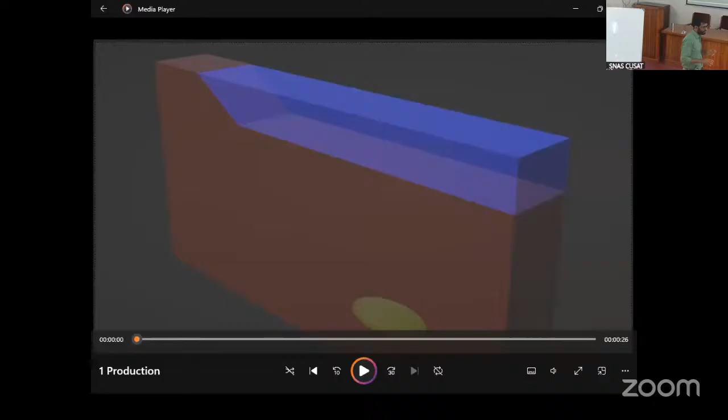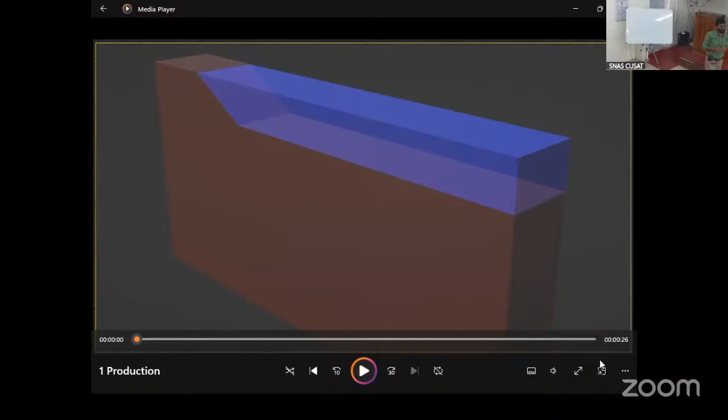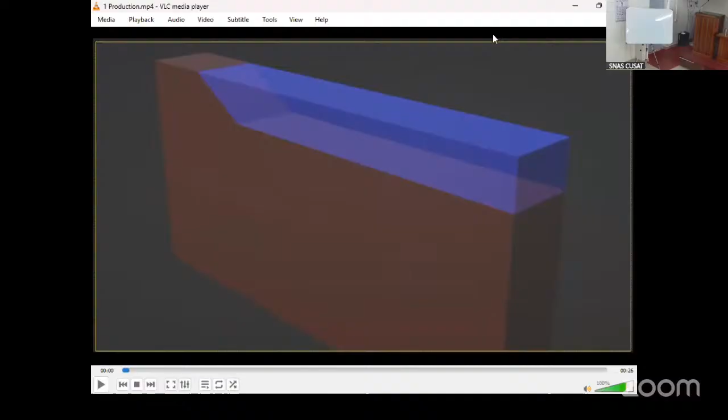Okay, and starting. It is, I think. Okay. See what you see from. No, don't play it, please. Just keep it on the very beginning. I don't want the... it shouldn't be on media player, first of all. There was a different one you were mentioning, right? It shouldn't be open on media player. It was a different one. No, you're opening that in a different player, right? Because I want to... right click open. I think here you can pause anytime, right? When you pause also, you get the complete picture, right?

Okay, see here, what you're seeing on the picture.

Now I am just trying to give you in 5 minutes a picture of how oil is being extracted and sent to the refineries. What is the whole intention of the oil and gas industry? They are extracting oil. Their main aim is to produce millions of barrels of oil or gas, then distribute that to the required areas. Oil means money. That is the only intention of it.

So now what you see here is a sort of simple animation. What you see in blue color, that is the sea, ocean, and what you see below, that is the seabed, the soil. Now, the entire process starts with... can I continue?

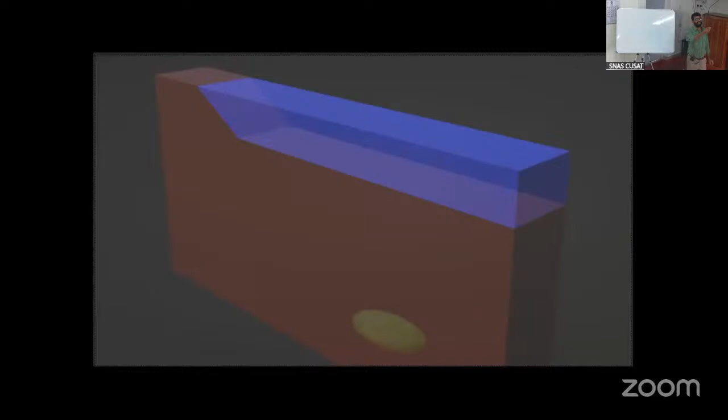Can you just play that, please? So we are finding a potential reservoir there. In that case, we are installing a jacket structure in that area. Jacket structure means we need to have the piling also. Then only it will be strong enough to receive the topsides.

Okay, can you start from the beginning and just pause? Okay, just play. Then whenever I say pause, you pause it. Play it, please.

You're finding the potential reservoirs. Okay, pause. Then the first thing is we are near to that vicinity, we are installing a jacket. A jacket means, this is the jacket structure, we are simply placing it there. Then the real foundation is the piles. The pile is what's holding the jacket onto the seabed. That is giving the restraints.

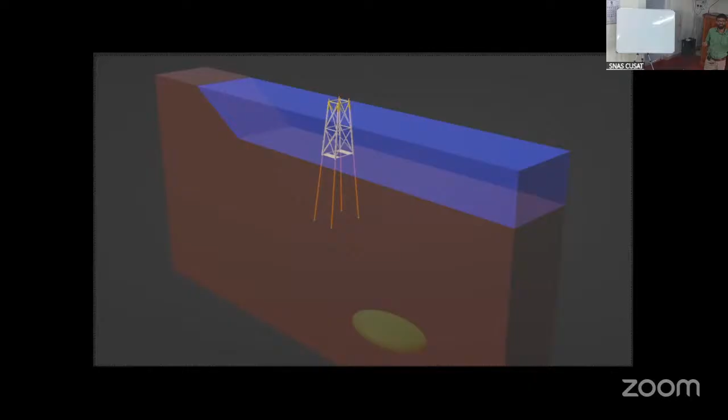Please continue. Then after the jacket, we are installing the piles. Pause it. Okay, once the jacket is installed, the piles are driven. In that condition, we have a very strong foundation. Now it is ready to receive the topside.

Okay, so now, what does the topside typically contain for a wellhead platform?

What is the ultimate aim? We need to extract crude from the reservoir. A main challenge with offshore structures is we cannot have a huge space like a football ground in the ocean. Even any square meter will cost money. So we need to have the very bare minimum facility in the ocean, doing only the bare minimum process offshore.

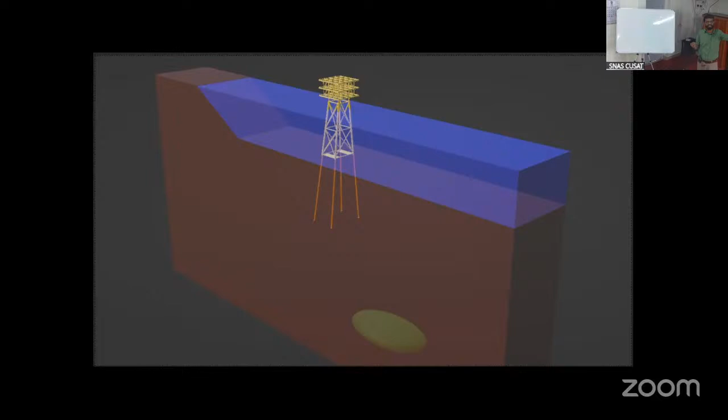After installation of the jacket and topside, the topside has all the required facilities to do the initial stages of processing what we are getting from the oil reservoir.

It's not crude oil as such, it will be a mix of crude, water, gas, and sometimes sand, all mixed together coming through. So what we do is the minimal separation and some conditioning at this offshore facility, only the bare minimum requirement. We cannot have too many equipments there.

So how are we extracting this oil? What you see in green color are called conductors. A conductor is just a big tubing, and through the conductors we do the real drilling. That drilling tubing will go all the way till the reservoir.

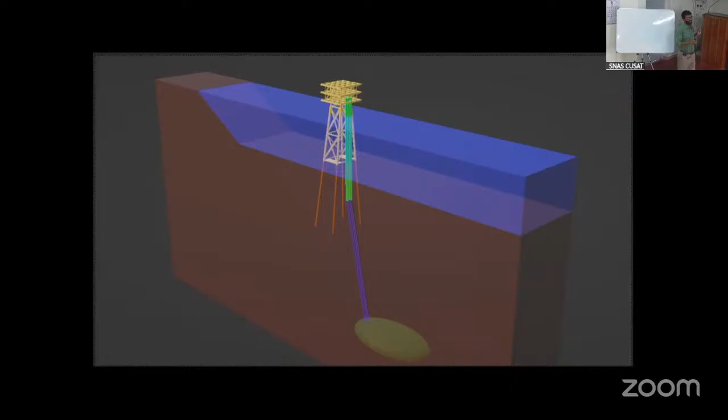This crude oil needs to be taken to the shore. How do we do it? What you see in this red color are called the risers. Whatever crude is produced will be taken through these risers, which are part of the jacket structure itself. From there, it will be taken to the shore through the subsea pipelines.

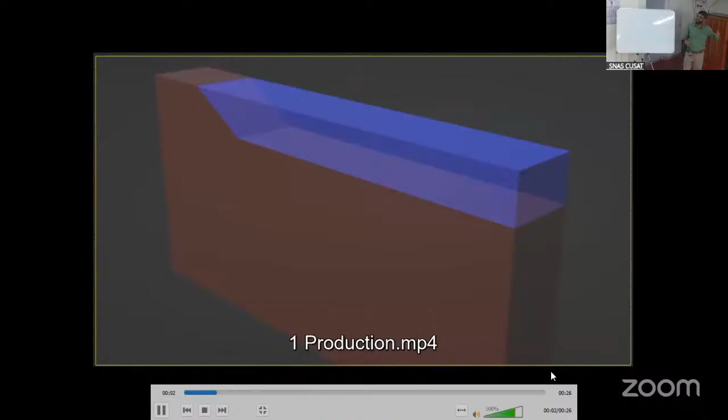Using these subsea pipes, it will go to the shore, then to the refinery, and then you know the rest. Let's watch that one more time.

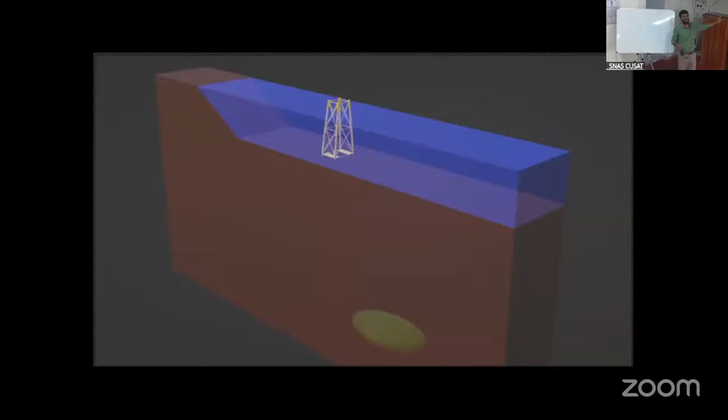Identifying the reserves, installing the jacket structure, then strengthening it using the piles, it's ready to take the topside. Then conductors are installed, and through the conductors the drilling happens, with the tubing going to the reservoir. The produced fluid undergoes minimum processing, filtration, separation and conditioning at the topside. From there, through the riser and the subsea pipeline, it goes to the shore. That's the process. Is that clear? Okay, now let's go to the next one.

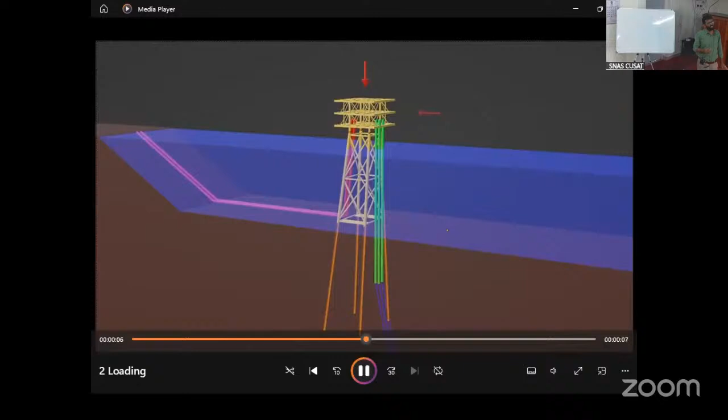Okay, now in this offshore structures, what are things I need your input into? What are the challenges you are expecting? There will be plenty of them. You can think of anything, even if it is wrong, it's fine. At least as long as you say something, I'm happy.

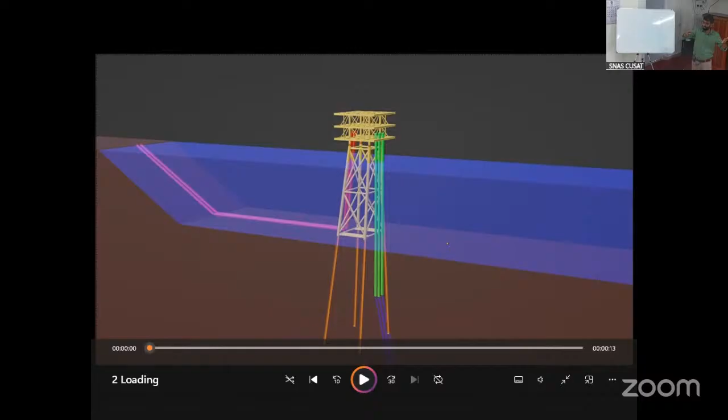Correct. Okay, so basically environmental loads. Broadly we can say environmental load - it can be heavy wind, heavy current, heavy wave loading. That is the most predominant. Then any other thing it will be subjected to.

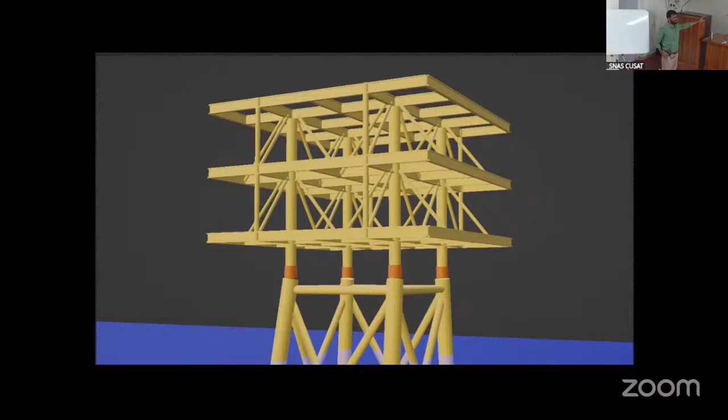Okay, can you just play that please? Okay, it is resting on the piles. You just see, what if the jacket structure is not present? Hey, play that please, stop it there. If the jacket structure is not there, it would have been something like this. Are you feeling comfortable with that?

Never, correct? So you might have seen in your midship section calculations, you have done all those things, right, all of you. When you take the midship section modulus, only the longitudinally running members is what you're taking, correct? You'll have a lot of lateral frames, but that is not contributing to the longitudinal bending. Only the longitudinally running members will be effective for that.

In a similar fashion, the entire load is taken by these piles only. But here, whether or not we have a jacket, the entire load is getting transferred through the piles, there is no change to that. But if we don't have a jacket, the failure mode will be different. It will just wobble and twist everything and come down, correct? That is how it is.

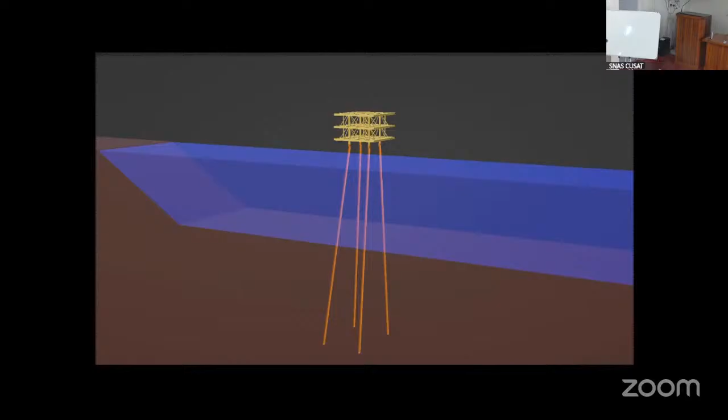What is the major difference happening here? Water? Partially, water plane area. Correct. See, when you have one country boat, it is rolling about this axis, correct? It is doing the rolling against this axis. But when you have one more, that also individually will be rolling about that axis. If you are connecting between these two, about which axis will it be rolling? The center, this one, correct?

When you think of that moment of inertia, it will be huge compared to double the moment of inertia of individual ones, because of the parallel axis theorem. If this is R, then AR squared simply adds to that. So the distance is more, the inertia is getting more and more. A single one versus this one, it will be huge.

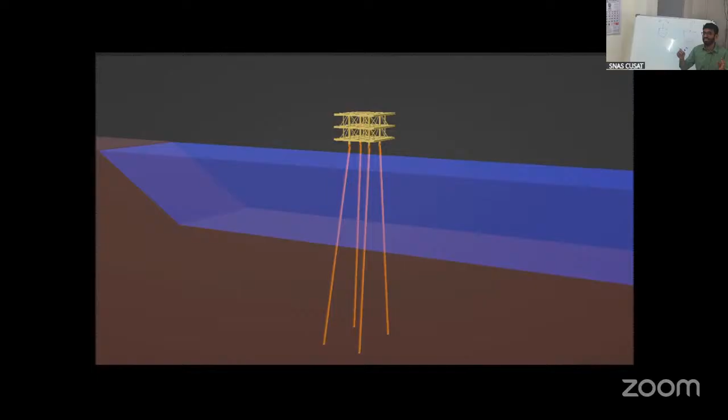Now think of, in some parts of Tamil Nadu and Karnataka, for leisure purposes there are some bowl-shaped boats. Not really a boat, just for leisure in very calm waters. There's some name for it too, I don't know.

Think of it, if you're standing on top of one, you'll feel the same problem. Now put one more and connect between both. Then what happens? It is stable in that direction, exactly along that direction. But are you safe? Any movement means you will fall in this other direction. So when you connect one more like this, it is quite strong along that axis, but along this one it is very weak. How can we solve it?

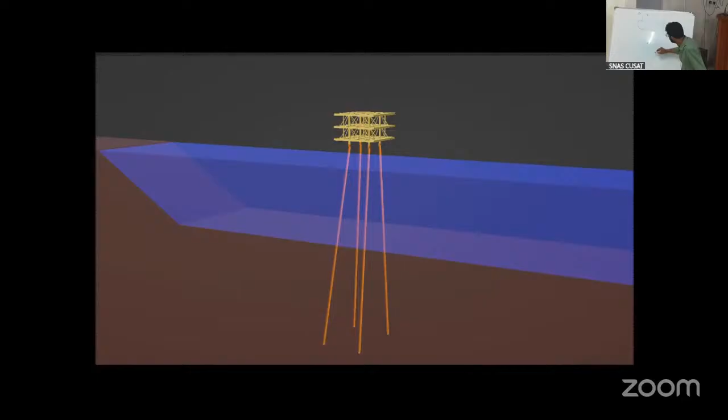Add two more, connect it like this. If you have 4 of those boats connected together, you will be comfortable to get into that. Now the moment of inertia axis is this one, and in the other direction it is this one, so it is quite stable in both directions. Quite good.

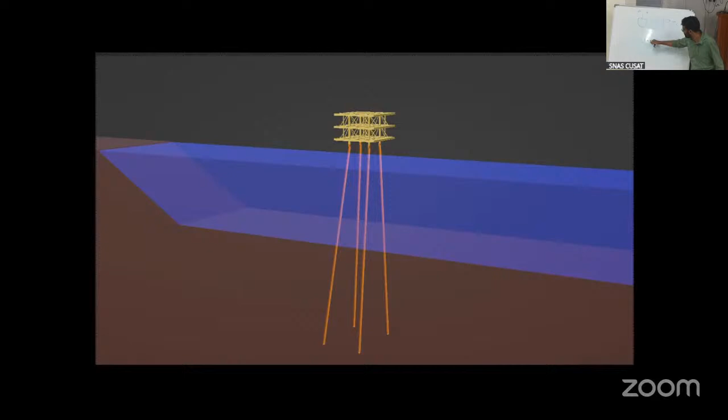Now, in this condition, the connection you made was with a very weak stick or something. If that connection gets damaged, what happens? Will it still have that stability? As soon as one of them is broken, it's gone. Think of it, one of them broken means this will come somewhere here, this will come here, it will just shift. So the strength is coming from ensuring that these 4 are at that certain distance.

That is exactly what our jacket structure is doing. The entire bending capacity is coming from the pile only. But the jacket structure ensures that the piles are at the specified distance all the time. So at any particular cross section, you will have something like this, and it will have a huge moment of inertia contributed because of this lever arm.

But in a jacket structure, it should be ensured that whatever loading comes through these horizontal members and the bracing, those members are capable of handling it. If those members are designed for the expected loads, then it is fine. Ultimately the entire load gets transferred to the jacket piles, and the pile ensures everything is safe.

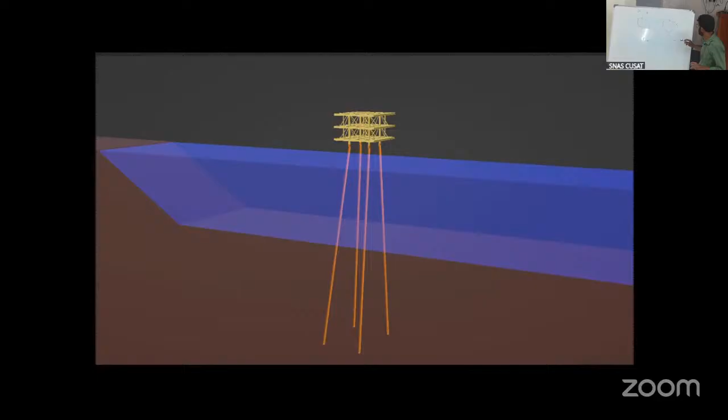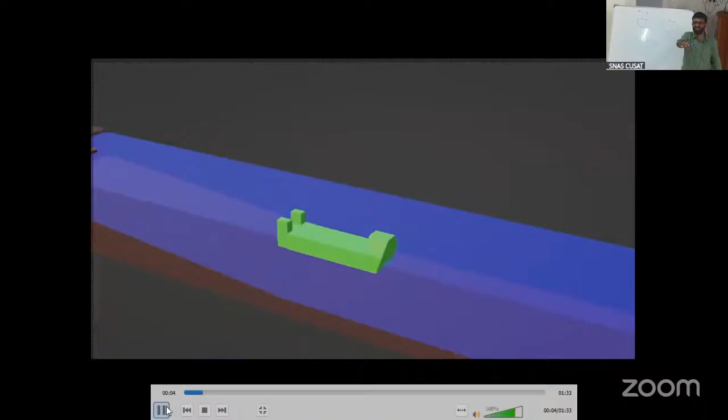Can you go to the next one? Let me, I don't know whether... next one please, you can play this and move to the next one. Okay, stop it there please. Then somebody from you was mentioning about the transportation, all those things.

Now, let us recall what we were talking about, all the challenges for the installed condition. For the installed condition, what are the challenges? Some of them we were just discussing. Now, it is not only the in-place condition.

Before reaching the required site location, it is getting fabricated. We need to take it to the required site. There is so much process happening there. Sometimes the fabrication will be happening in Batam, Indonesia, and it will get installed at North Sea. Sometimes it will be in China, installation at Qatar. So for the entire journey, it may take more than a month sometimes. We have challenges associated with the transportation, all those things.

There I would like to highlight a few points which may be interesting to you. I'm not talking about the fabrication stages or challenges associated with that. Possibly Joby would have already given you a better picture on that.

Now you can see that usually the fabrication happens at the quayside. You can see the top side is near to the quayside, there. I'm talking about the first stages. Once it is fabricated, it should be taken to a barge. Through barge only we can transport it to the required installation site. So now how do we transfer what is fabricated on the ground to the barge?

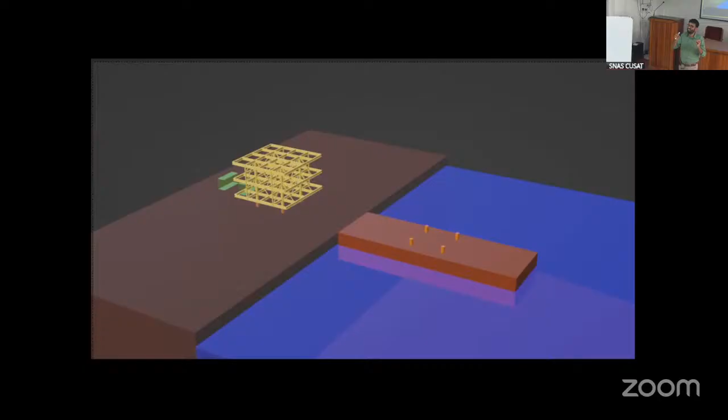Trailer or cranes. Crane is one method of doing it, but that's for very small top sides and jacket structures - it will be possible, but for bigger and heavier platforms that will not be feasible sometimes. Whichever is more economic, we'll follow that. I'll tell about lift later.

Now what I'm trying to say is usually it will be through trailer load out. There is something called SPMT, self-propelled modular transporter. That is nothing but a set of wheels. The key essence of that is it has got a series of hydraulic jacks which are computer controlled, ensuring that the top level is flat.

So if it is traveling through an inclined portion, the elevations of the forward jacks will be lower so that the top is flat all the time. Like that, it will be moving.

Now you can see that the top side is already placed. Below the top side there are things in orange color - these are the stools on which it is resting now. These are the so-called SPMT.

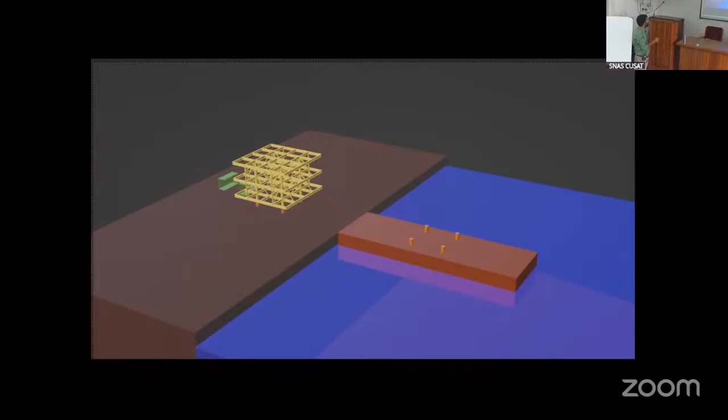This is just giving - this is the installation site, it's so far. It is trying to show you that.

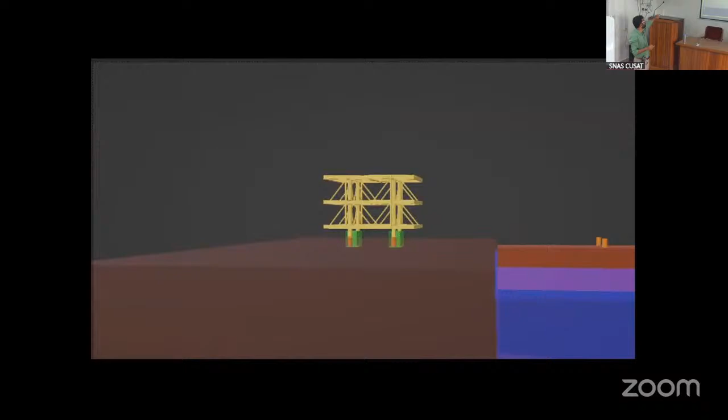Yeah, these SPMTs, once it reaches, will just elevate it, then it will be taking it to the barge. It's all very fast shown here. Then the jacks will be lowered. Once it is placed onto the barge, then it is ready to go - not completely.

When the ocean voyage happens, it is always subjected to motion responses. There will be accelerations associated with that, loading associated with that. So we need to have tie down everything properly - that is called sea fastening. We need a proper sea fastening so that everything is ready to go. So we are doing all those things here.

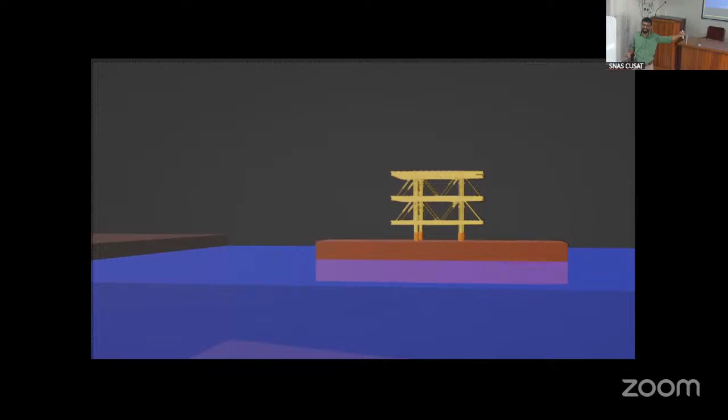Then on the barge, with the help of a tugboat, we are towing it to a certain area. Barge is taking it. There was a good video prepared for this, but at the last minute I didn't save it - it just crashed. Then somehow, yesterday night only I prepared this.

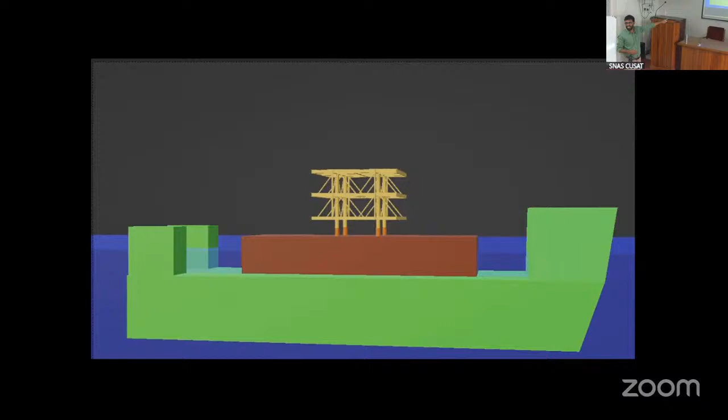Do you understand this or not? That's what this is. Yeah, it is a heavy transport vessel. I'll be explaining that.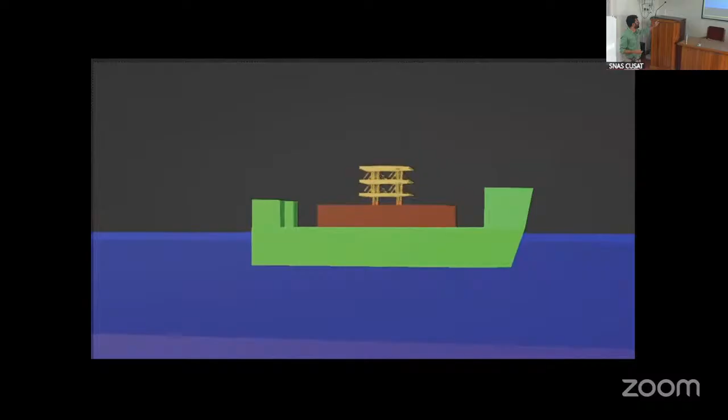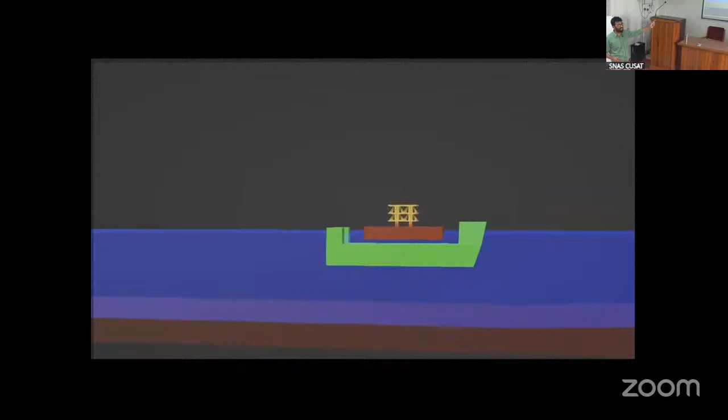Now the heavy transport vessel is also moving. Once it has moved for a while, after reaching a certain distance, it is ballasting - it is lowering, the barge is free now, and the barge is going to the side. It is going near to the jacket structure now. The jacket would have already been installed to install the deck, correct? Now tell me why we are using a barge and a HTV.

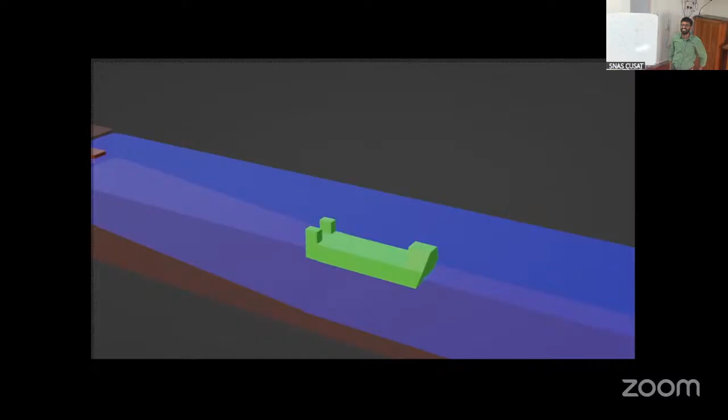Hello? Hello, can you hear me? No, cannot hear now. Even now? But you were able to listen what I was mentioning earlier.

On the screen, can you unmute? The screen shows you are muted. So far, nothing was heard. Hello? Is that okay now? Hello?

Okay, thanks Binu. Is that okay now? Yeah, fine, thank you. Okay, Pramod, were you able to listen to what I was talking about for the past hour? I was trying to send messages that you were on mute, but finally I tried to disturb your session.

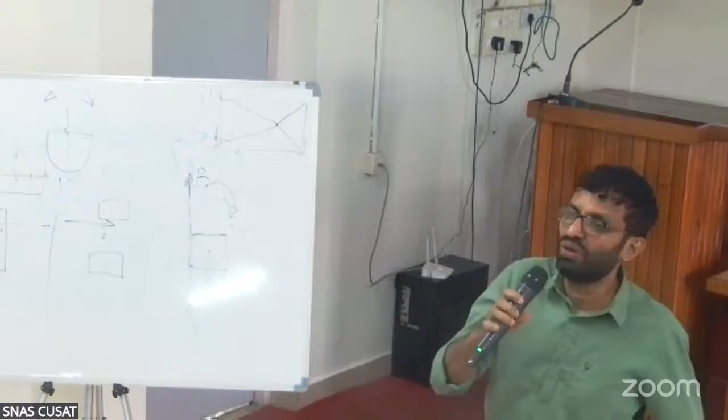process of fabrication and installation also. So there will be a separate team for that, and specifically for installation there will be another team. What they take care of is the installation part alone. So if we have a completely, what I would say, they are the ones managing the final installation process.

So here I'm telling that we are using certain barges for the transportation, then HTVs, then again by barge, all those things. Now, in the engineering side, people might have done the entire transportation analysis based on the barge parameters given, the RAOs given for those particular barges or HTVs. Then these

installation engineers, that team, they will be the ones provided with a set of assets. For each organization there will be their own installation vessels, barges, but limited resources will be available. That is what they need to manage for all the projects happening in the office. So possibly, depending on if one of the projects is getting delayed, they will have to swap some of the barges or a heavy lift vessel or whatever it may be.

Those feasibility studies and the impact of that, and in the offshore also, during the installation process, they are the ones who need to ensure that whatever documentation, design, calculation done by the engineering is sufficient. Or if they feel, based on their installation philosophy or anything, that any additional checks need to be done, they are the ones to highlight it.